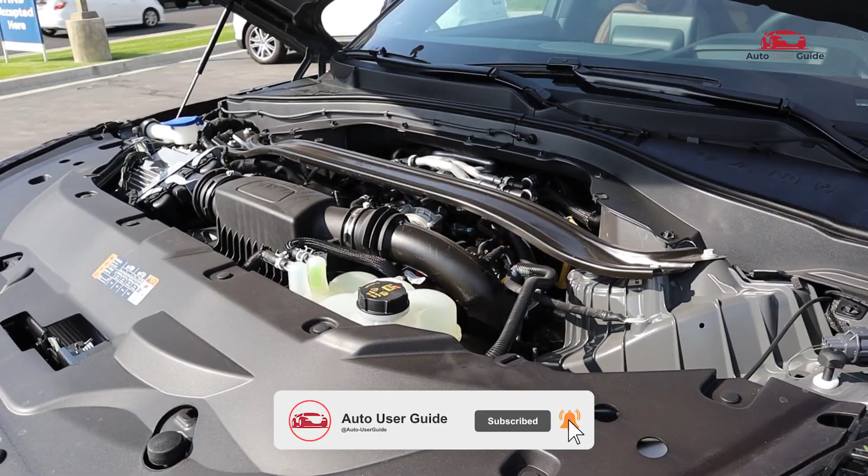Are you trying to locate the fuse box in your 2023 Lincoln Aviator? Wondering where each fuse is placed or how to read the fuse box diagram correctly? In this guide, we'll walk you through the exact location of the fuse box and provide an easy-to-understand diagram to help you identify the fuses for various systems.

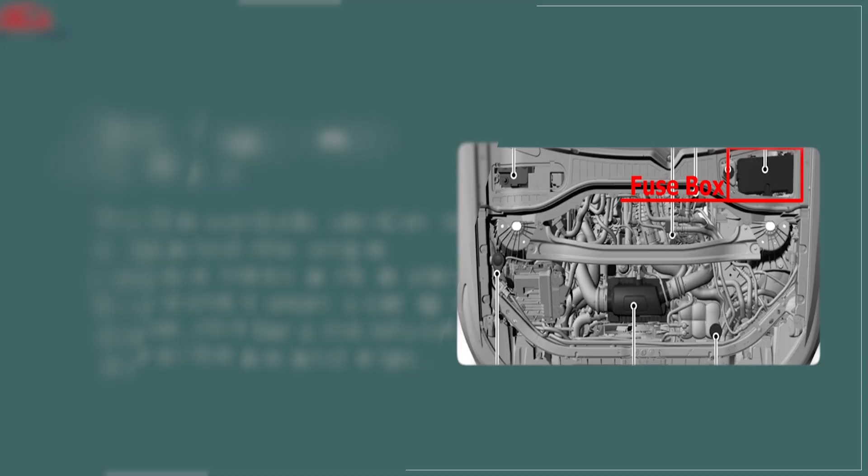Engine compartment fuse box. The engine compartment fuse box is located near the battery and houses fuses and relays for essential systems like ignition coils, fuel injectors, starter, ECM, lighting, HVAC blower, fuel pump, and rear wiper. It safeguards these circuits by cutting power during electrical faults or overloads to prevent damage.

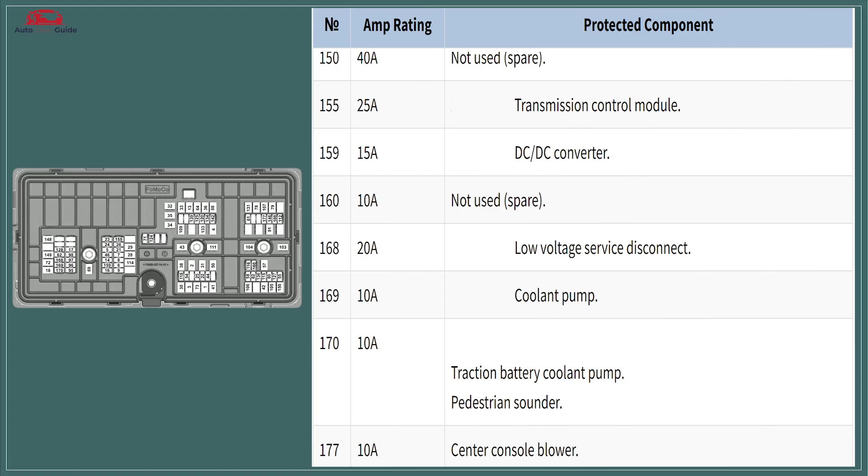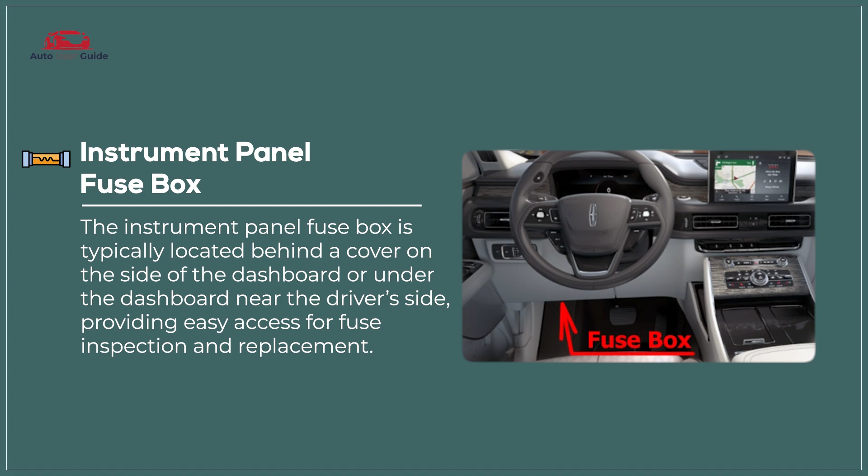Instrument panel fuse box. The instrument panel fuse box protects various interior electrical systems by controlling power to components like the radio, interior lights, power windows, dashboard controls, and safety features, preventing damage from electrical overloads.

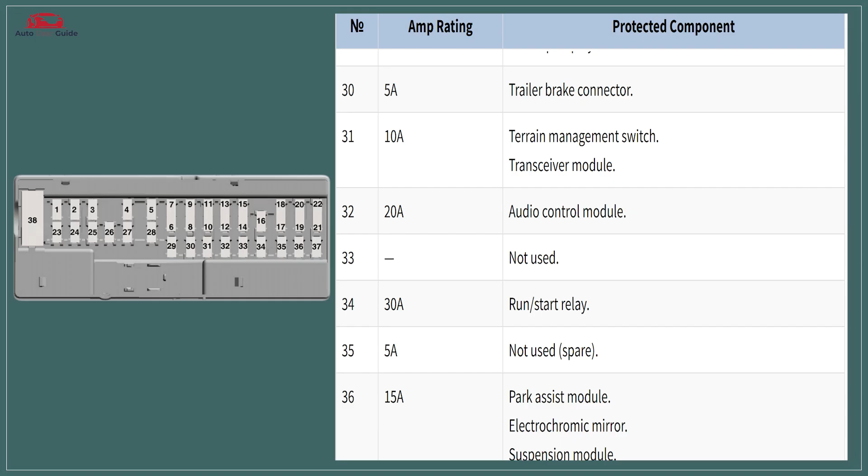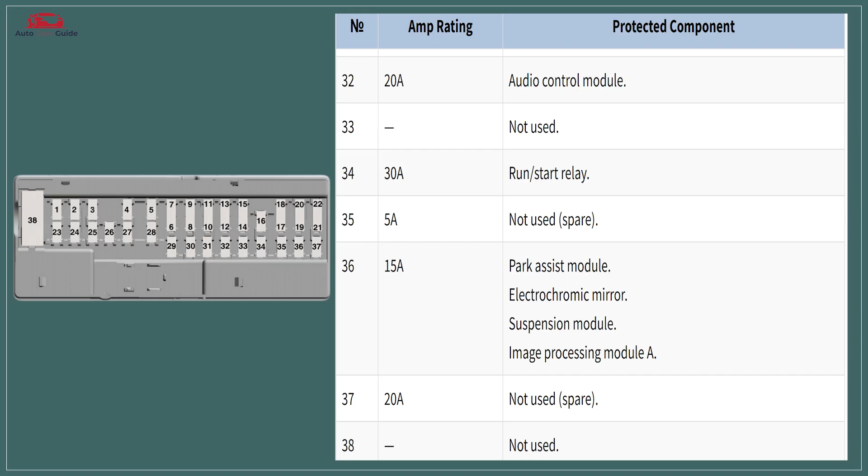Types of fuses: blade fuse, standard blade fuse, mini blade fuse, maxi blade fuse, micro 2 fuse, micro 3 fuse, J-case fuse.

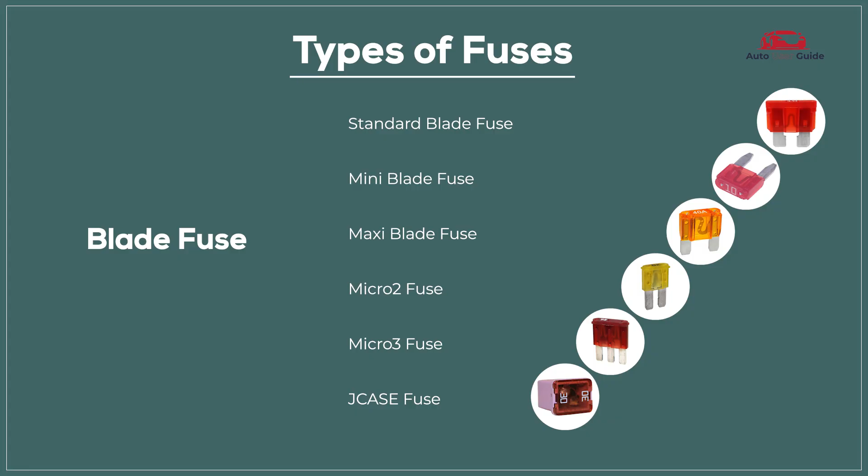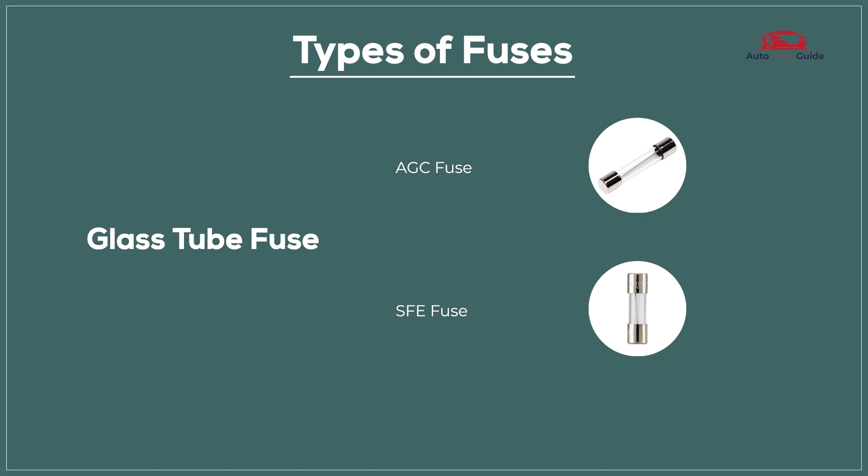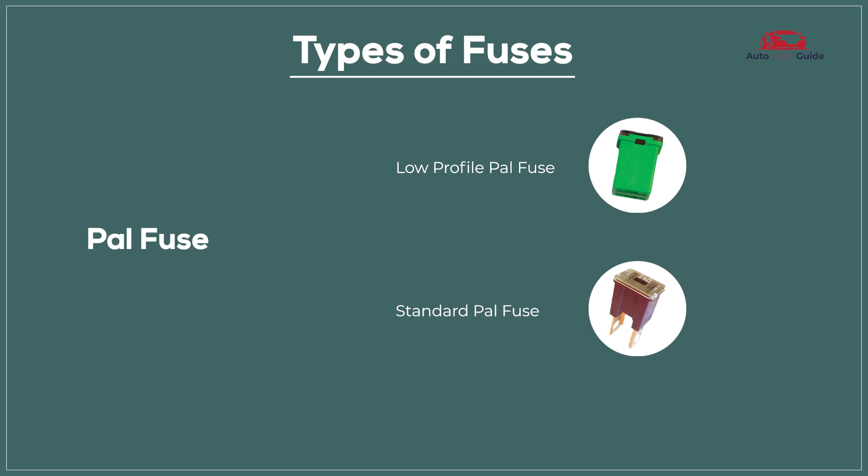Glass tube fuse, AGC fuse, SFE fuse. Ceramic fuse, Bosch fuse, DIN fuse. PAL fuse, low profile fuse, standard PAL fuse. Link fuse, mega fuse, high amperage link fuse.

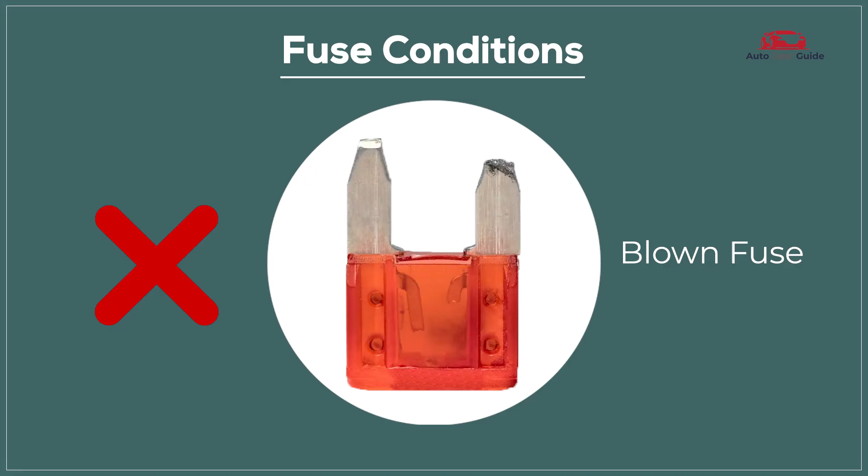Fuse conditions: blown fuse. A blown fuse means it's no longer functioning and needs replacement, while a perfect fuse is in good working condition and performing as expected.

How to change fuses: turn off the vehicle, locate the fuse box, identify the faulty fuse, remove the faulty fuse, inspect and obtain a replacement, install the new fuse, test the replacement.